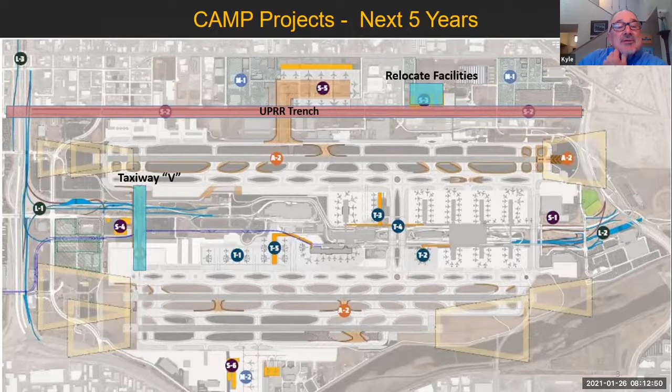So construction on that - the railroad, or actually the next 5 years, you can see the railroad. We're going to be required to relocate facilities in order to do that railroad, and also to do the taxiway V, and the T3 into concourse location.

So the railroad trench project is $450 million, and that was back 2 years ago, and it was rough order of magnitude. It didn't include a lot of utility costs, so I'm not confident in that number right at this point, but that's what we had in CAMP, so that's what I'm keeping. That will be adjusted for time escalation, and once we find out how many utilities need to be moved, we can make a better budget estimate.

So for the Union Pacific Railroad funding, we did get a $25 million grant to basically grade separate 24th Street and the railroad. That will happen regardless of whether the other trench project happens. We will be making that grade separation there. We got the Federal Railroad Administration grant.

The funding for the trench would be through aviation funds, and the taxiways that would go over the trench would be FAA grants, we're hoping. Again, the negotiations for the railroad are ongoing, and the delivery method will be CM at risk with a pricing component.

So this is the agreed upon plan and profile - I don't know if you can see it, it's pretty small. It basically goes from 24th Street to 40th Street. Very slight grade, and the full depth isn't that long. It really just is enough to get a taxiway over it in the middle there.

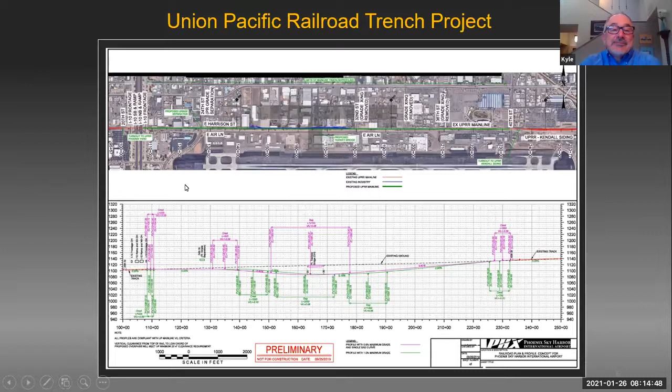And just an example of the trench section and the siding track, which will be required.

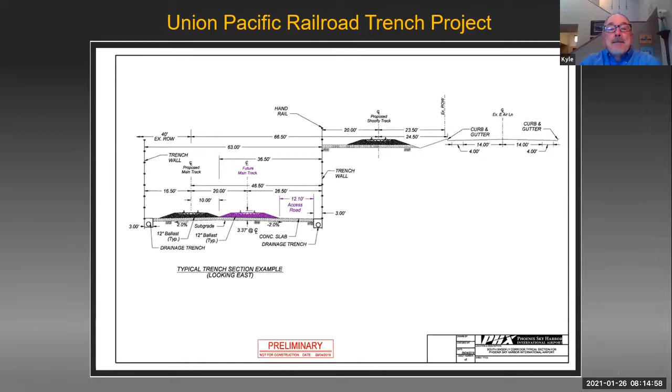So the next CAMP project that has been put on hold is the Crossfield Taxiway. You'll see that it says U or V there - sorry about that, it's unclear whether we're going to do U or V. We've basically planned for both. U is a little cheaper because it takes out less; it doesn't require removal of the facilities group from their current location. If we do V, we have to relocate them up north, so that's a little bit more money.

Anyway, the budget again is $330 million, that was done 2.5 years ago, so that would need to be adjusted. We're looking at funding this with FAA grants and aviation funds. We did complete a project definition phase, basically a planning and program for that to make sure it would work. We needed to understand if it was constructible and allowed traffic from the west side to continue to come in, and how we would build that so we could get a good estimate for the cost.

The bridges at the SkyTrain underpass are already complete as part of the SkyTrain project, so it wouldn't impact the train operation. Project delivery would be CM at risk, phased construction, again keeping Sky Harbor Boulevard open. There are enabling projects - facility relocation if we do V, and West Cargo modifications for either of those two.

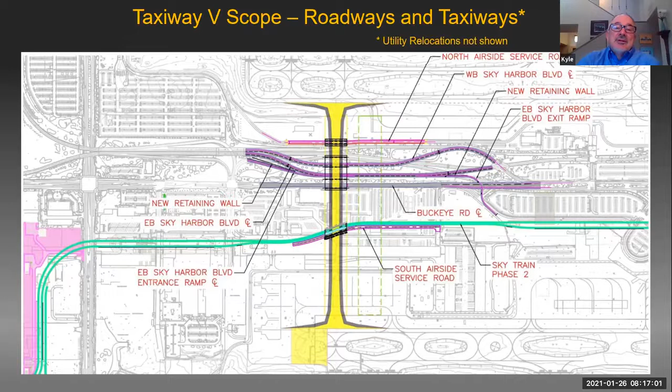You can see the plan and scope of taxiway V, and what we would need to do for the roadways and how we'd be phasing this. Utility relocations aren't shown - we would need to do a utility investigation to understand where all those are. We haven't done that yet.

The design does work. We verified with the MAG update for how they're looking at their interchange there at Buckeye, and how - I think this is called the Swerve project or the Weave project - on I-10. Just wanted to verify that it works.

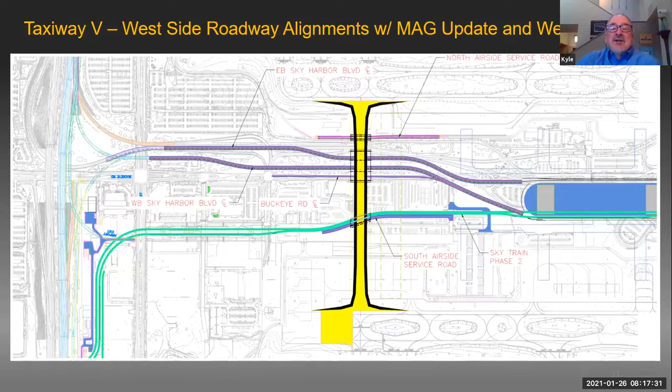And if we do V, we would have to relocate facilities and services up north of the railroad. This is just a test fit of where it would go on the west side of the dog track over there in the parking area.

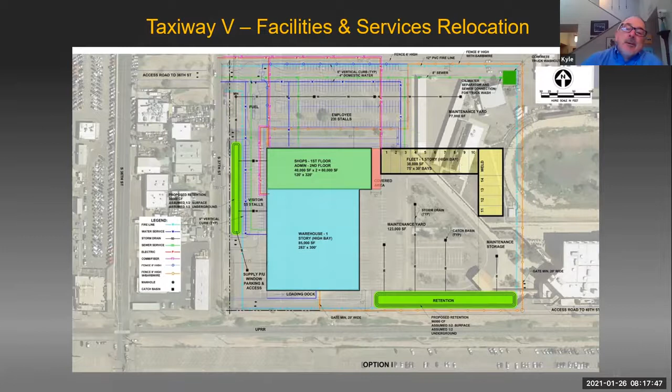And then also the west air cargo modifications - we would need to remove 7 bays, cargo C, to clear the object-free area.

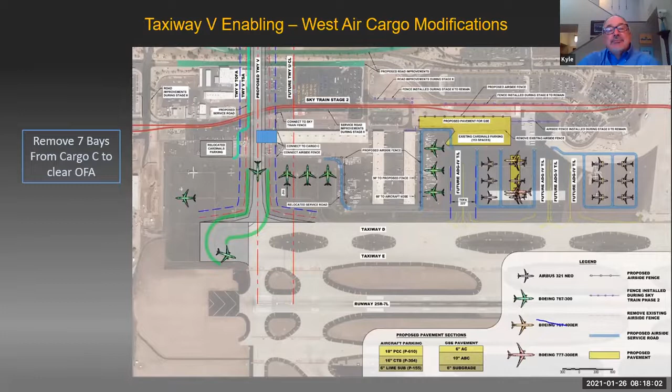These projects that are put on hold, especially the CAMP ones, are really contingent on passenger numbers and revenues. At this point, I think we're running about 40 to 50% of what we did the previous year, so that's not good for us. Of course, it doesn't help that Arizona's the number 1 COVID state at this point.

So Terminal 3 into concourse, this is probably out even further than those others. I'm not sure what the need is. Before COVID, we had a need. We were gate constrained. We were actually buying buses to do hard stands. That's all pretty much gone away with COVID. So this project is basically to do a second concourse north of Terminal 3, in between Terminal 3 and Terminal 4. The scope of the project, shown in CAMP, is that it would connect to both Terminal 4 and Terminal 3. That's up for debate. We did start and put on hold the planning process. We got to the first meeting in March and put that on hold.

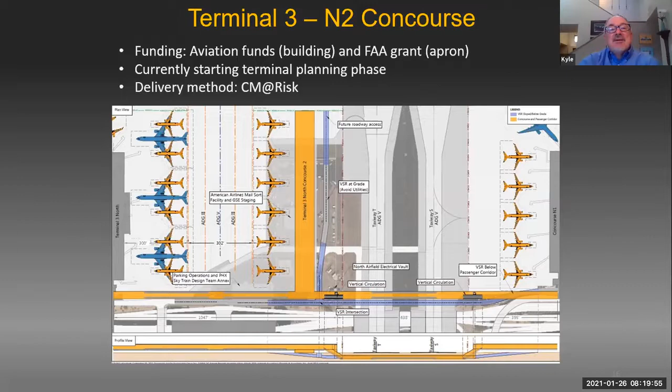So, ongoing CIP updates. This is the part that I cut down because there were a lot of slides and I couldn't email it to myself from the city system, so I had to cut it down. But basically, we have four major ongoing projects.

Terminal 3 modernization is pretty much complete. I think there's some punch list items on the south apron that Hunt Austin is doing, but I didn't include that in here. The four major projects we have going right now are SkyTrain Stage 2, and the status of that is the fixed facilities, which is the Hensel Phelps construction part of that project, is substantially complete. We're working on punch list in the stations and also working on getting power to the switch yard that we built.

APS power up Buckeye. So if you go up Buckeye, that's what we've been doing for the last two months or so, messing that roadway up. So really it's in Bombardier's hands now, working on the train control and all the equipment that they need to run the train, also manufacturing the trains back in Pittsburgh. And then going to start testing here in the summer, testing the train. We are having nightly shutdowns of the SkyTrain in order to do that work, and it will be disrupted at night quite a bit for the next year and a half.

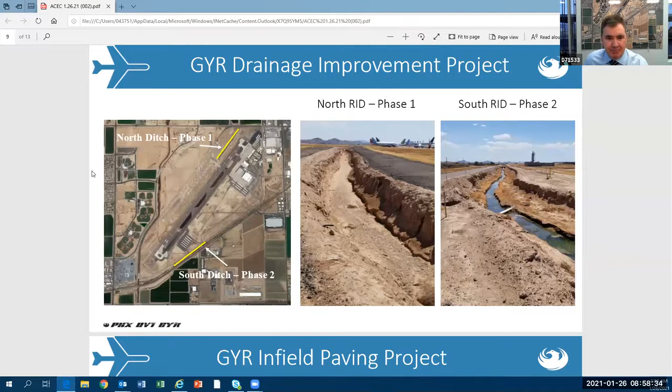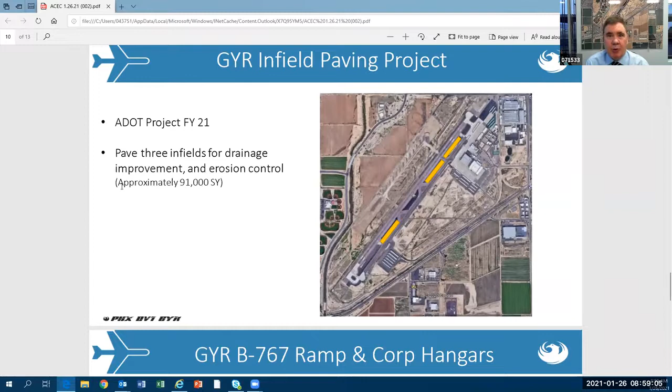Our infield paving project, we hope to get a grant in July of this year to pave 3 different infield sections at the airport. Right now it's just native soil, or some we have millings put in. But with exhaust and rotorcraft operations like helicopters flying in, it blows soil and debris around. So we're going to pave that to help with erosion, and it also helps with wildlife. It's about 91,000 square yards, so hopefully we can pave that here in the next year.

Another project we have is a Boeing 767 ramp designed to park two 767s. We're pretty much out of apron, out of parking space here at the airport. The orange there is designed - CNS did a great job for us. I think it's essentially 100%, maybe still waiting for a few comments, but it's primarily designed now, and we hope to construct it. It's in the FY22 program for an FAA grant, but if monies come sooner, we'd certainly like to do that.

That ramp will open up that area there - about 75 acres. And the blue, our corporate hangars, our FBO, are going to build this summer as well. You can see how that lines up, and we're leveraging that taxi lane. The other development there isn't imminent right now, but at times Amazon and others have talked to us about air cargo, so we think at some point in the midterm there will be some of that as well. We just show that there for scale.